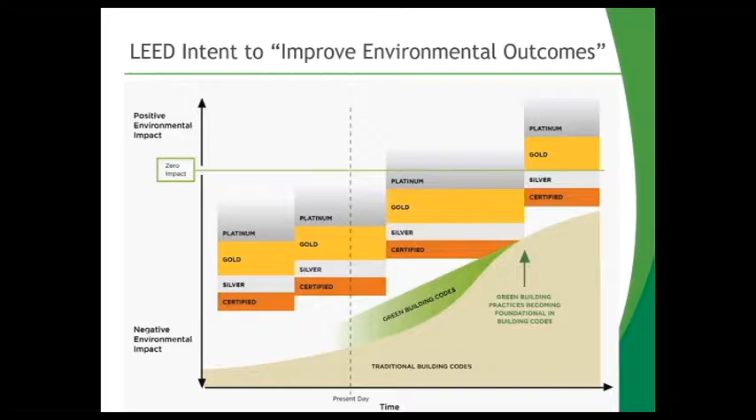So with each new version of LEED, U.S. Green Building Council aims to really raise the bar, ultimately with the goal of moving beyond just reducing impact, so reducing the bad things that buildings cause, to actually creating benefits to the environment, which is what you can see in this graphic here. It's a pretty big aspiration. So how successful have they been?

LEED is arguably the predominant green building rating program in the US, and it's expanding globally. So as of October, more than 167 countries and territories were using LEED for projects. More than 92,000 total commercial projects are participating in LEED, which means they've either registered or have become certified, and that equates to over 19 billion square feet of building space.

So of the 92,000, more than 39,000 projects have been certified, so that leaves about 50,000 projects that are still going through the certification process. And as far as the uptake of the latest version of LEED, only over 1,000 of those 92,000 projects are working with the latest version of LEED.

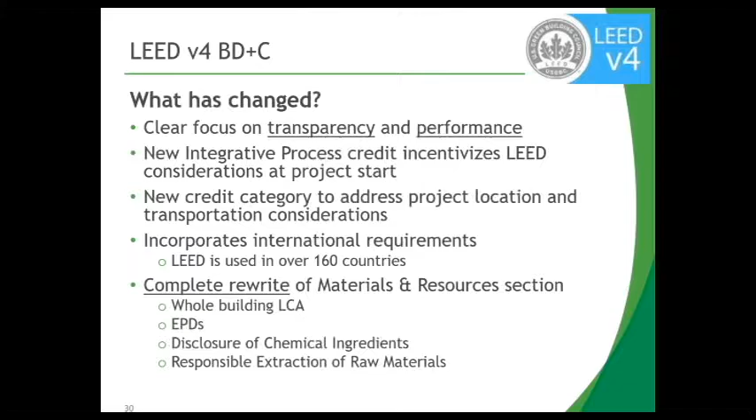What is most interesting, I think, to us is that the materials and resources section of LEED was completely rewritten in this latest version to include more holistic assessment methods like whole building life cycle assessment and EPDs, as well as disclosure of chemical ingredients, so material composition, and responsible extraction of raw materials throughout product supply chains. So we'll talk about LEED and cold-formed steel framing more broadly than just materials and resources, but this is the most relevant section to us.

So this summarizes the different credits and points that you can get in the materials and resources section. So you can see there's 13 possible points. LEED in total has 110 possible points. And along the bottom, I know it's a little difficult to see, but to get certified in LEED, you need to have at least 40 points, which is actually a pretty small amount considering the total possible points. And then that ranges up to a platinum certification, which requires 80 points.

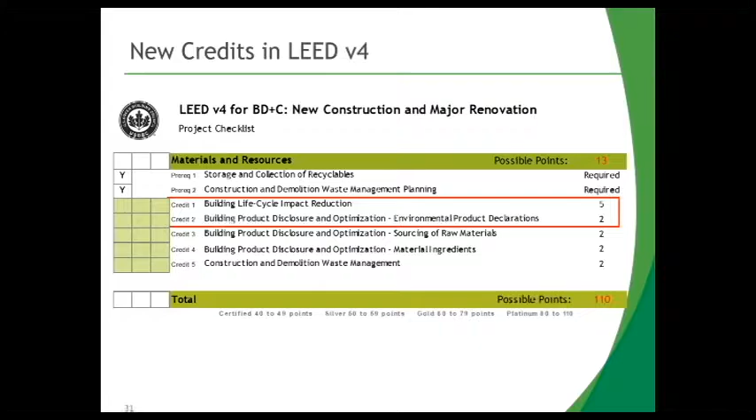And the way that this is organized, you have prerequisites that you must meet in order to get certification, as well as optional credits that you can pick and choose to apply for in order to reach those certification levels. And I highlighted in red here the two credits that focus specifically on LCA. And since this is the first version of the program to use LCA, I just wanted to spend a couple minutes

talking about it. So life cycle assessment is a very standardized, comprehensive method to evaluate potential environmental impacts of a product, system, service, material, pretty much anything you would like to assess throughout its entire life cycle. So if you think about the steel life cycle, which is very circular because of the high levels of recycling that happen with steel products, you'd be looking at all of the potential impacts throughout that life cycle.

There are 4 main steps to conducting an LCA. Arguably, the most important one is the goal and scope definition. That's where you figure out what it is you want to study. So what does your product life cycle look like? And what are your system boundaries and things of that nature. And then once you know what you are studying, you then conduct an inventory analysis. That's where you collect data on energy, material consumption, emissions, waste, how much material is being recycled. And you do that for every step in the life cycle that you're looking at.

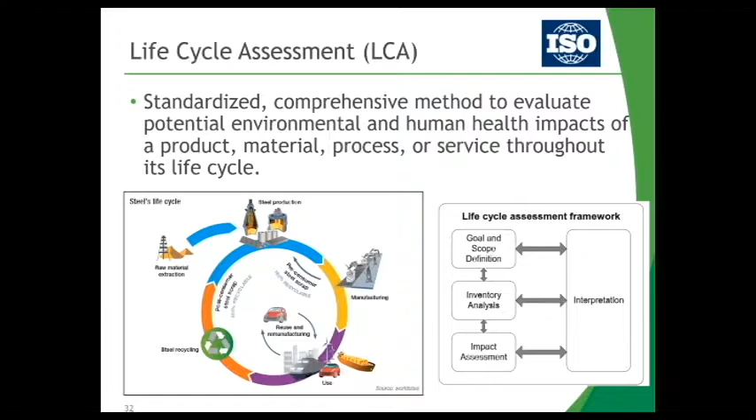Once you have your data collected, the next thing you do is you assess for impact. So you look at all of the emission and waste flows and determine which impacts they cause and what the magnitude of those impacts are. And interpretation is something that happens throughout. It's really just to double check that you're on the right track and your system boundaries are set properly and your data quality is high enough in your study.

And then ozone depletion potential looks at emissions that have the effect of depleting the ozone layer, causing a hole in the ozone layer. Acidification potential looks at emissions that cause acid rain once they're released into the atmosphere. Smog potential looks at emissions that form ground level ozone or smog. And then eutrophication potential is nutrient emissions to air and water that then deposit on the land or in waterways, and they cause things like algal blooms that are a big issue.

There are additional impacts. We often, in our line of work, promote that when you're looking at a comprehensive product, you should consider all relevant environmental impacts. The 2 that I'll point out are land use change and biodiversity impacts, or habitat disruption. Those are particularly important for things like wood products, but they're often ignored in wood product LCAs.

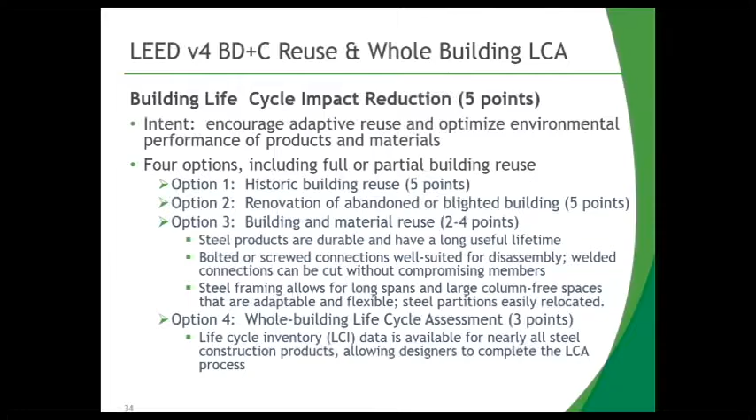There are 2 different commercial software tools that are mentioned specifically in LEED for this purpose. And we as SRI, AISI, have been collecting life cycle inventory data for steel production that is represented in both of those products, making it as easy as possible for designers to complete the LCA process for steel products.

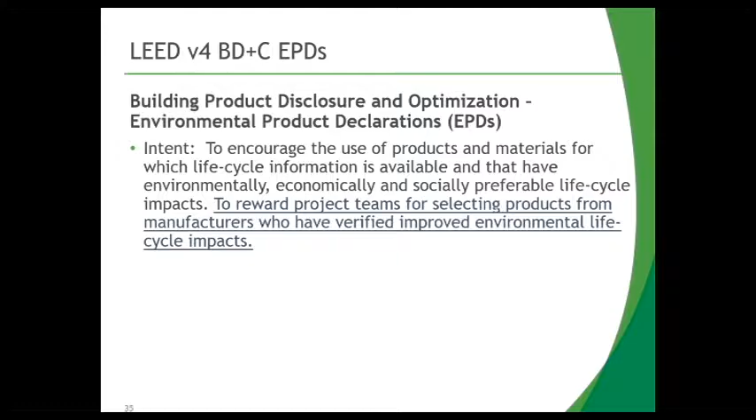So at the product level, LEED has a credit for environmental product declarations. Those are essentially summary documents that report LCA results for individual products. The intent here, they claim they want to reward project teams for selecting products with verified improved environmental life cycle impacts. So the way this works, there are two options. The first one is really just disclosure. It's simply having an EPD available for the products that are used in the building. And it doesn't really matter what the EPDs say or what the results indicate for those specific products. This is just simply about disclosing the impacts.

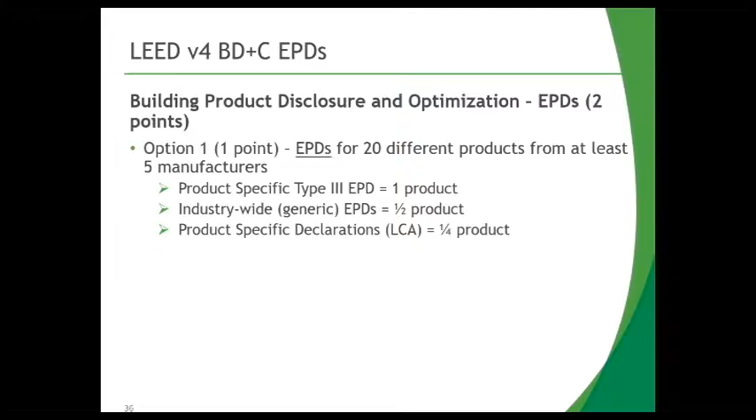To get the 1 point for this credit, you have to have 20 different EPDs from at least 5 manufacturers. And it's important to note, we'll talk a little bit more specifically about EPDs, the industry-wide EPDs that summarize an EPD for a specific product in a region only count as half a product for this calculation. So if you were looking at all industry-wide EPDs, you would need 40 instead of 20 to get the point here.

There's another option in LEED under this credit, and this is actually where they start looking at performance. So if you can demonstrate through a manufacturer-specific EPD that the products being used in the building have lower impacts than the industry average, you can get an additional point through this. And it's a bit different: instead of just having a certain number of EPDs, you actually have to do a cost calculation based on the total cost of the building. So it's a little bit different there.

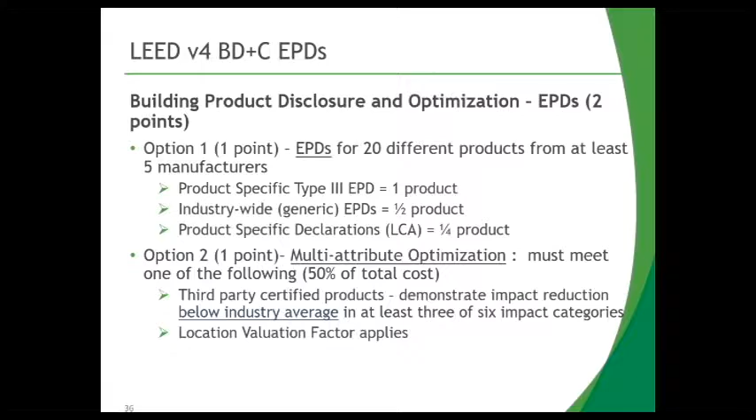And I'll also point out that there's something called a location valuation factor. And this shows up in several different credits in LEED. And I have a couple slides to explain what that is. But essentially, if you have a product that's sourced from very close by, you get to double the value of that product.

So several of you are likely familiar with this development process here, but I just wanted to explain that the development of an EPD follows a very structured process that's standardized by ISO. The first step is to develop a set of product category rules, and this is a set of rules for a very specific product type that tells you how you conduct your LCA and what information needs to be reported

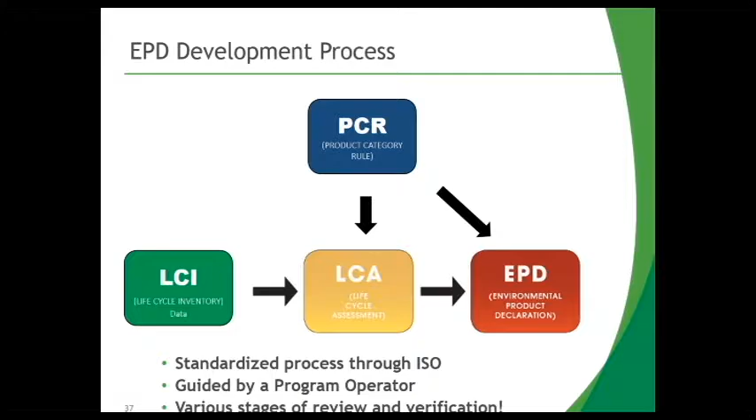in your EPD. As I mentioned, life cycle inventory data is the data that feeds into the LCA analysis. And then the EPD is just the summary of the impacts, the LCA results for that specific product. All of this is guided by what is called a program operator, and there are various stages of review and verification that have to happen throughout the process.

So we published an industry-wide EPD for cold form steel studs and track nearly 2 years ago, amazingly. I think several of you on the call were probably involved in this process. Our current EPD does not expire until 2021. However, we are collecting all new life cycle inventory data for steel production this year. So we may choose to update it a little early in the event that the data, as we expect, will show reduced environmental impacts for steel. So stay tuned for that.

And in fact, over the last 2 to 3 years, there have been industry-wide EPDs published for nearly every major steel construction product that is used today. And we have a full list of these EPDs available on our website. It's on both the Steel Recycling Institute and the SMDI website. So folks that are seeking out materials for LEED projects can easily see that we have these available.

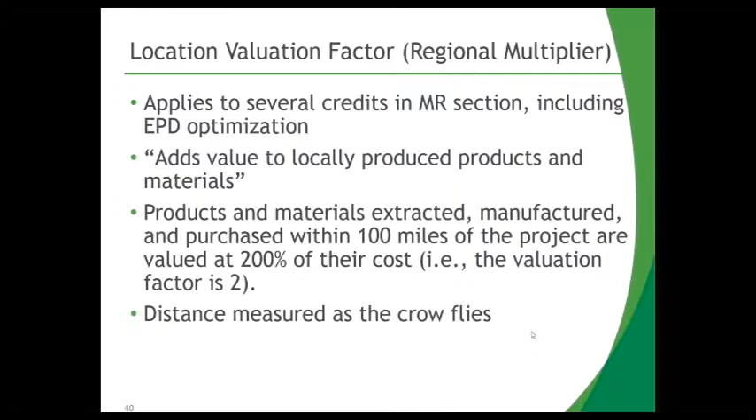And as I mentioned, LEED has this aspect built into it called location valuation factor, and it's really just a regional multiplier. So this applies to several different credits in LEED, and it really adds value when you have products that meet very stringent criteria. So products and materials to get this multiplier must be extracted, manufactured, and purchased within 100 miles of the project. So this distance is like a radius, and it's measured as the crow flies, not as the

truck transports the materials. So I have a graphic here on the next slide to illustrate this, and I'm sorry that the text is a little bit small. This comes right from the LEED reference guide. But as you can see, this is an example of a concrete product, and the 100-mile radius is that dotted circle there in the center, which actually looks like it's circling Pittsburgh, interestingly, which is where I'm located.

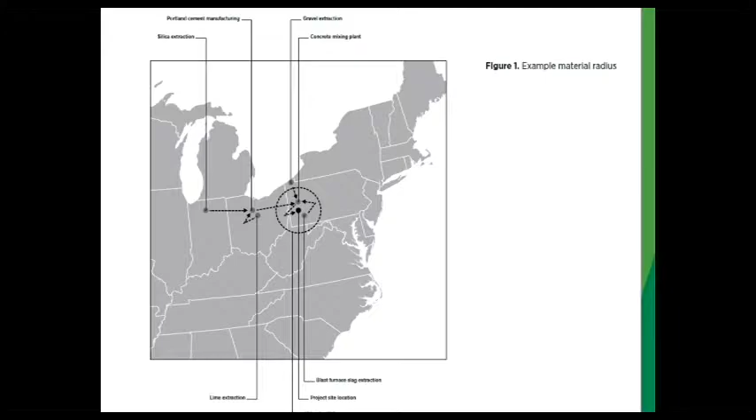But you can see here that several of the processes that are part of making concrete are outside of the radius. So silica extraction, Portland cement manufacturing, gravel extraction, lime extraction. So according to the LEED criteria, this particular product would not qualify for that multiplier.

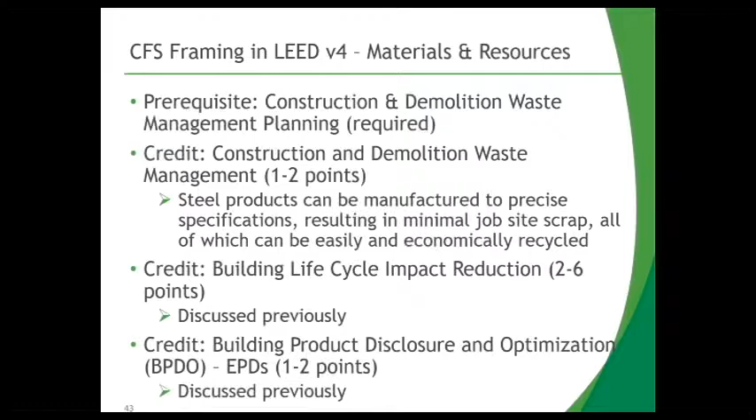There's both a prerequisite and a credit that pertain to construction and demolition waste management. And as you all know, steel is highly recyclable, and it's also manufactured at very precise specifications. So not only does it reduce job site waste, but all of that, what they would consider waste in LEED, can be easily and economically recycled, so it easily achieves these points. We already talked about the building life cycle and product life cycle credits. Those are covered in the fact sheet as well.

And then there are some credits that look at the sourcing of raw materials. So the intent here is to reward the use of products that are verified to have been extracted or sourced in a responsible manner. And there's some criteria to explain what that means. But in practice, this just requires that companies that produce these products and materials report their practices throughout their supply chain. And this can be done using something like a corporate sustainability report or corporate social responsibility report. And several North American steel companies publish reports that address this.

There is another option under this credit, and this is where the recycled content credit is buried. It used to be really prominent in LEED version 3, so LEED 2009, but now it's buried in this credit here. So it wants you to use products that contain recycled content. It also applies to products with take-back programs. Wood products get a pass here as well.

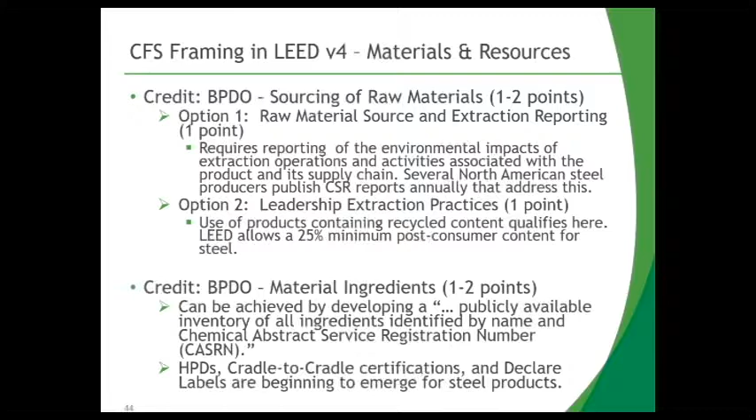So you can achieve this credit by having a publicly available inventory of all ingredients in the product by CAS number. You can also conduct one of the specific health declarations that are the programs that are out there, like health product declarations or cradle to cradle. Declare labels are also accepted in LEED. So this is something we're keeping a close eye on because we're seeing a lot of interest in this area. And we're starting to see some steel products coming out with these type of certifications and labels.

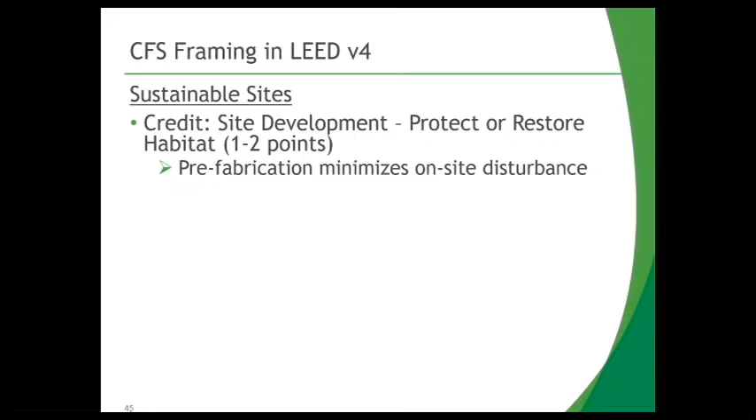And then outside the materials and resources section, LEED has several other topic areas, and steel products, cold form steel framing, qualifies for some of these other categories. So for an example, the sustainable sites category, they're looking at site development, so specifically protecting or restoring habitat around project locations. And in the fact sheet, we talk about how the prefabrication or panelization of steel products minimizes on-site disturbances.

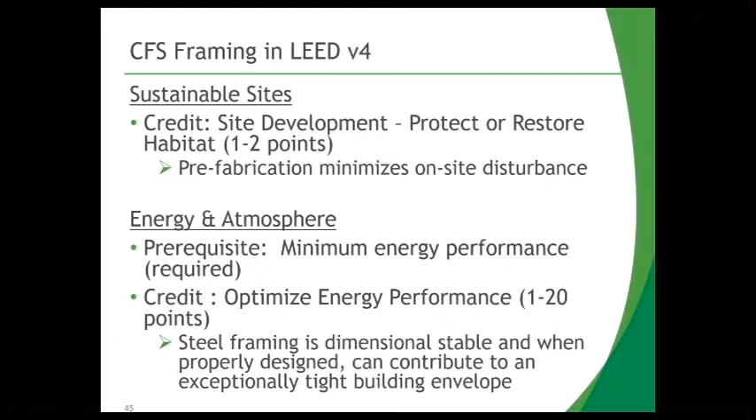And then in energy and atmosphere, this is one of the largest sections of LEED. There's both a prerequisite and a credit that talk about energy performance. So because they're looking at a building as an entire system, this is a somewhat indirect contribution, but still an important one. So in our fact sheet, we talk about how steel framing is dimensionally stable and with proper design can contribute to a very tight building envelope that can meet or exceed the energy performance requirements in LEED.